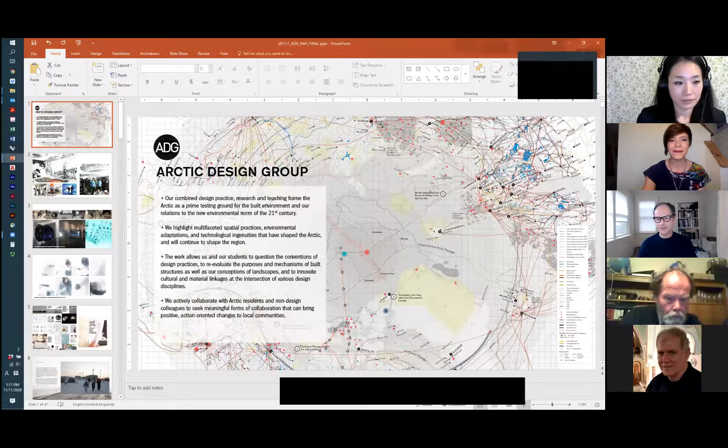Before we start, Leena and I are both based in Charlottesville, Virginia, and we want to first acknowledge the traditional custodians of the land that Leena and I are on today, the Monacan Nation, and pay our respect to their elders past and present.

First we'll introduce ourselves, and then we'll get our talk going. My name is Matthew Jull. I'm an associate professor of architecture at the University of Virginia. I'm also a co-founder and director of the Arctic Design Group, a research and design organization Leena and I started in 2013, focusing specifically on the Arctic and its challenges in terms of design. I started actually as a scientist before going into architecture. I was a geophysicist working in Iceland and also previously in the Yukon. Then I decided to become an architect and went back to school. So here I am, and the Arctic is what we believe is one of the most critical areas to focus on in our work. That's who I am, and I'll pass it off to Leena.

Hi everybody, thank you Victoria for the great introduction. My name is Leena Cho. I'm an assistant professor in landscape architecture at UVA, University of Virginia School of Architecture, and also a co-founding director of the Arctic Design Group together with Matthew. Similar to what Matthew described, I also come from a non-design background and then switched into landscape architecture. I used to work a lot on the political side, first studying political science and then moving on to a lot of NGO work

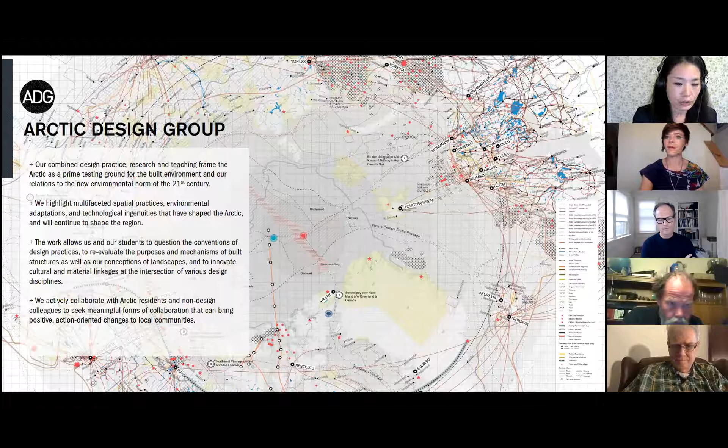before switching my career to design and landscape architecture. So I think, before getting into some of our most recent Arctic work, we bring a quite interesting interdisciplinary approach that bridges between science and community-driven work, and how we can begin to engage these issues through a design-specific lens, mainly through architecture, landscape architecture, and urban design. So with that, I can start with our presentation. Today's lecture is organized in three parts. First, we want to introduce our critical and main approaches to how we begin to research, engage with the community, design, and also teach.

And then we'll be also showing some examples from our own students' work, mainly through the studios that we've been coordinating, organizing and developing in the past several years. And then moving on to sharing 5 different projects that we believe touch upon some of the key areas, mostly in Alaska. And then leading the lecture by introducing and sharing some of our most recent work that bridges from our current past work into the next several years.

So to start off, what you see on the screen are the text, for example, here. These are some of the approaches that we bring, that we think are important when we start to think about the built environment in the Arctic.

First, our combined design practice, research and teaching really frame the Arctic as a prime testing ground for the built environment in the 21st century, especially in relation to the changing environmental norms. And then we also highlight multifaceted spatial practices, environmental adaptations, and technological ingenuities that have shaped the Arctic and will continue to shape the region.

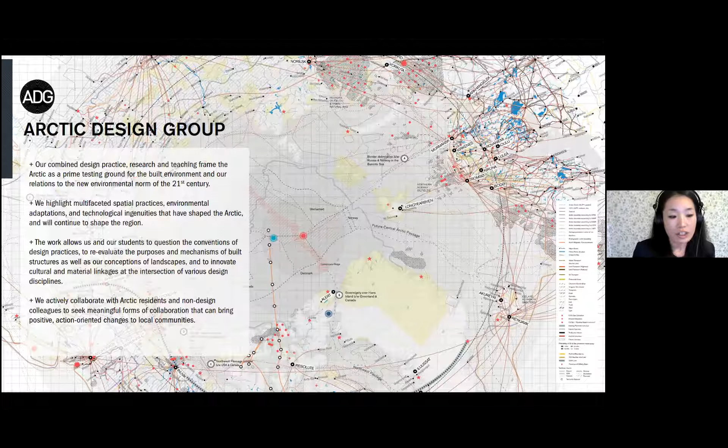But also in the midst of this, we actively collaborate and reach out to Arctic residents and non-design colleagues, such as environmental scientists, engineers, social scientists, and artists, to seek meaningful forms of collaboration that can bring positive, action-oriented changes to local communities.

So first, we're going to talk a bit about some of the earlier work we did when we formed the Arctic Design Group. And before I do that, I want to just acknowledge some of the folks on the call. I see Jack Hébert is there, and CCHRC, Cold Climate Housing Research Center—amazing, we've learned so much from you through the years. As we talk about our work today, it's really a learning process for us as we understand other ways we as architects, landscape architects, and urban designers can work meaningfully within the Arctic region.

And then also collaborating with the Anchorage Museum, we produced a set of what we call the Arctic Portals, which were a set of small exhibition pieces. Again, the focus of these was to create immersive environments that people who hadn't been to the Arctic could maybe understand certain aspects of it.

Either the idea of being in permafrost, or the idea of what it's like to be in a whiteout condition, or in very, very bright light. It's sort of very primary kind of conditions.

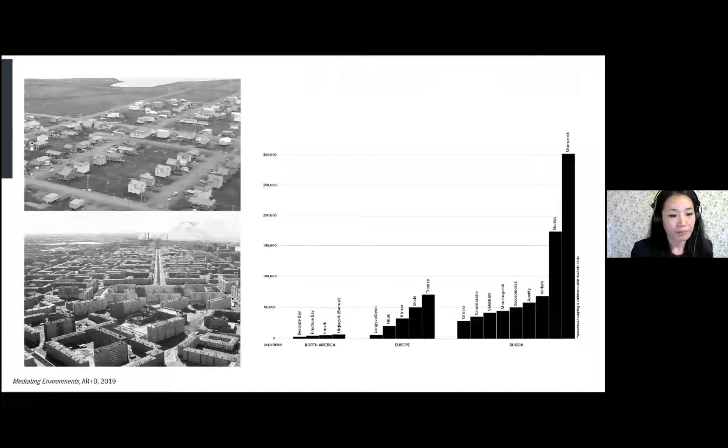One of the things you read about in the media so often is how the Arctic is undergoing drastic changes in the environment through climate change, and also economic transformation, and pressures on remote communities throughout Alaska, northern Canada, and the Trans-Arctic region.

But the one thing we want to acknowledge is that the Arctic is filled with so many resilient people who have had the capacity to live under extreme conditions for millennia, and learning from indigenous communities throughout the Arctic is really an important step as we approach the Arctic as designers.

What's interesting to us is also understanding and acknowledging how vastly heterogeneous the Arctic is. That's one of the remarkable things about our work, traveling out through and visiting cities and communities through Russia, Northern Europe, Canada, and Alaska.

You can see in this image in the top left, an image of Barrow, or Utqiagvik as it's now called, in the summertime, a nice rectangular or rectilinear grid of houses, almost like a suburb. Below that is a picture of Norilsk, one of the big mono-industrial cities in northern Russia.

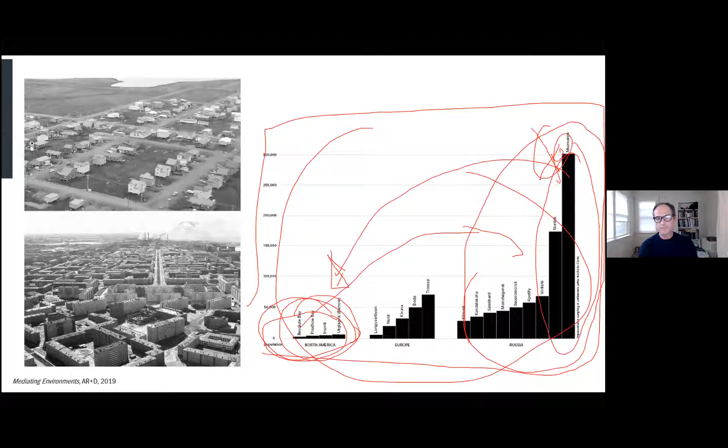As we look at conditions like this, different ways in which the built environment has adapted and evolved, we're bringing forward the idea of how cultural and social value come into play here. This is a really critical aspect of architecture that we want to emphasize in landscape architecture and urban design: our goal is not to optimize for efficiency and economy only, but to optimize for social and cultural value at the same time. How do we bring that into the conversation? That is one of the key elements of our work.

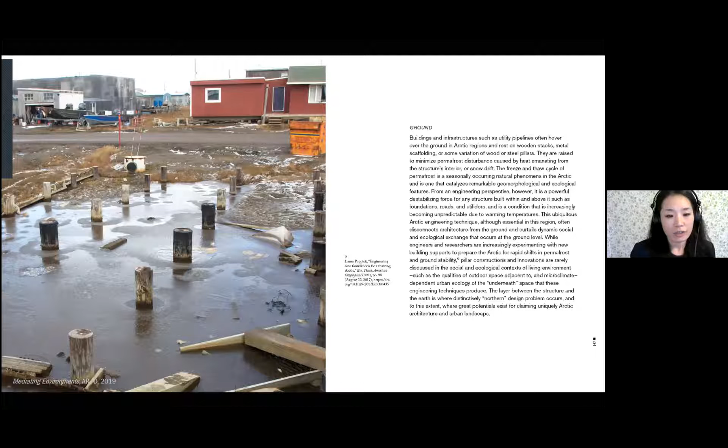Another area where we can focus is the ground itself - the permafrost ground, thawing, frozen, constantly changing. To us, the ground is really important infrastructure for Arctic communities, not only because it is literally the thing that everything stands on, but also various aspects of the built environment, whether it's the foundation for houses or buildings, to utility, to roads - they all intersect and touch the ground itself.

Another key element of our approach is to also think about public buildings and schools. Schools have historically played a really difficult role throughout the Arctic, from residential schools that have caused tremendous amounts of pain through Native Alaskan and Inuit and Inupiaq families and other tribes throughout the Arctic, by creating a condition where their culture, their traditional cultures, were negated through enforced curricula that have been introduced. On top of that - and this is changing - it can go further, but it's changing.

But the other part is that the buildings, the schools themselves are often also very institutional in how they're designed. How can we actually bring more feedback from communities into the design of these schools that really support the values of the community itself, about thinking about the land and the environment? Because essentially, where the children are learning becomes a kind of central hub of a community. Schools need to be important institutions that are really supporting the cultural and environmental needs of the people living there.

Just to add to that, schools often function as the community center, right? In many of the Arctic communities throughout Alaska, but also elsewhere, it's really where the private, personal becomes the collective and communal. So schools are, as much as the ground and the streets, where we can begin to think about what the shared spaces might be like, whether that is indoors or outdoors or anywhere in between.

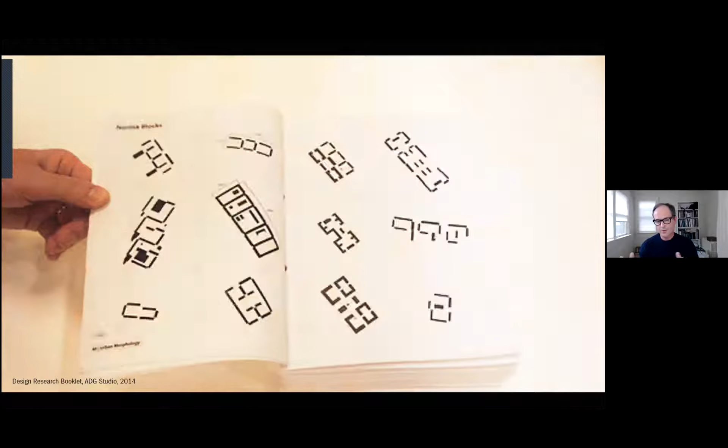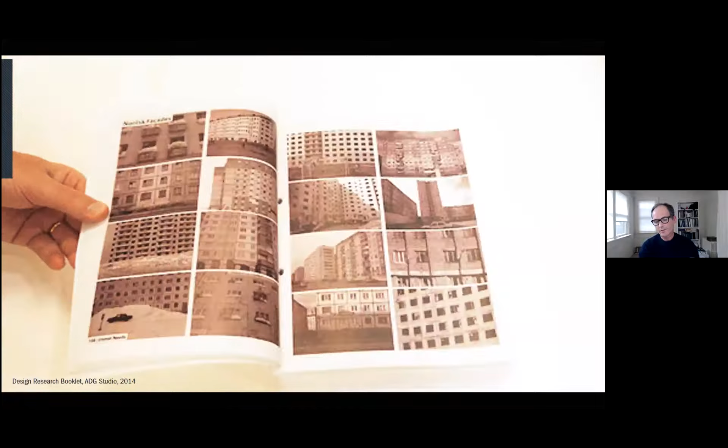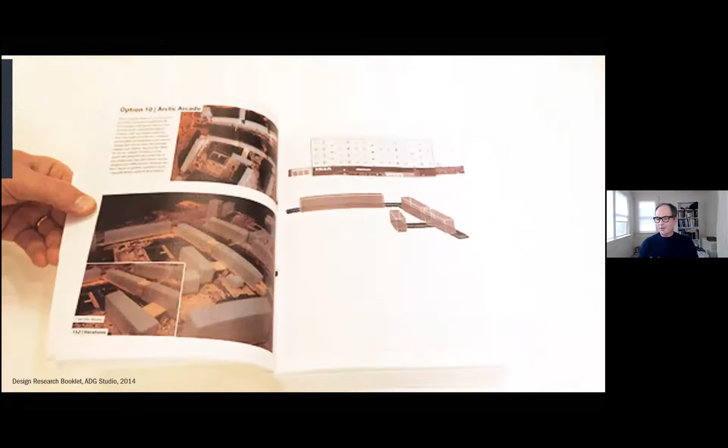So the next section we want to talk about is some of the work we've been doing with our students. Every year, UVA has been really a fantastic place for us to develop the Arctic Design Group, because we're given opportunities to teach studios focused on the north, and they've been incredibly supportive in that capacity.

So for them to travel up and not only just visit, we really emphasize this isn't a holiday vacation, it's a research trip to understand, study, meet with, and listen to people and residents, communities throughout the Arctic.

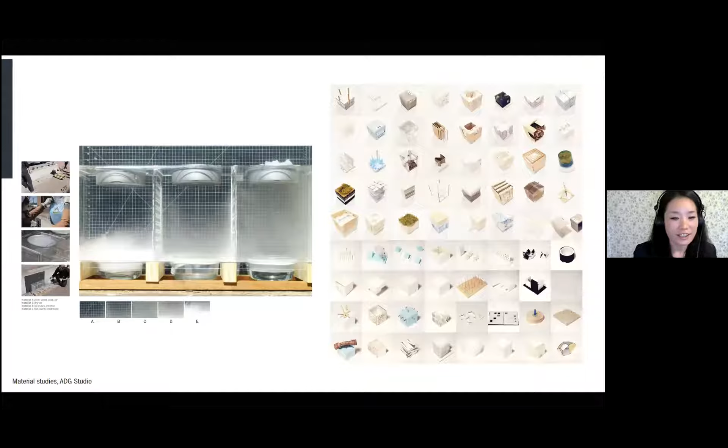What you see on the right side of the image is how we can begin to modify and introduce a variable into the environmental system, so we can think of this as design principles that could facilitate certain design ideas. On the left side is the fog and visibility of the landscape, created by different types of fog, and how the air and aerodynamic systems might work, constructed through model fabrication, examining what gets passed through when different perforations and hole sizes are introduced into walls or structures, and what gets left behind as residual material in material spaces within that system.

As Leena is describing too, part of our pedagogy as instructors with our students is to have them learn by making, by experimenting, but really starting with fundamentals. Understanding how water behaves. In this case, how does it melt? How does it freeze? What happens when it freezes?

These are just examples of experiments that are sort of alchemy. Some of them are maybe really obvious - if you're a scientist listening to this, you're like, well sure, of course water expands when it freezes. But for students to actually develop these little devices that monitor and calibrate, to understand what that expansion means physically - this is part of the language of design in some ways, being able to go from the analytical to the creative, and how these two modes of thinking can inform each other.

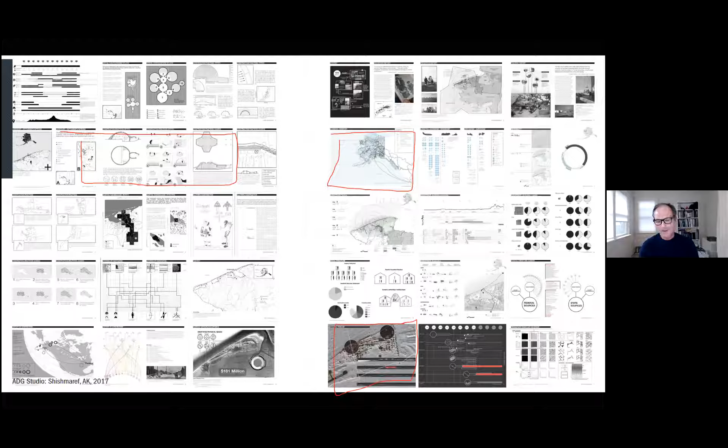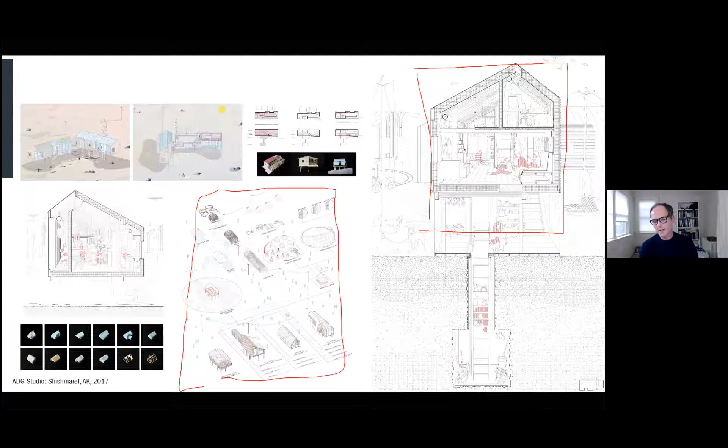So these are a set of studies. We won't unpack all these drawings right now, but essentially they show some examples of the kind of work, getting down to the detail of the wall section, and not only just the conceptual idea.

And then making physical models is really part of the currency of our work as architects and landscape architects, to convey ideas of scale and materiality. These are abstracted, of course, but they are part of our forms of communication, and this can actually work incredibly well. We would have loved to have taken the work to Shishmaref and talked to the community there. Unfortunately, we don't always have funding to do these things, but we keep trying, and that's our goal.

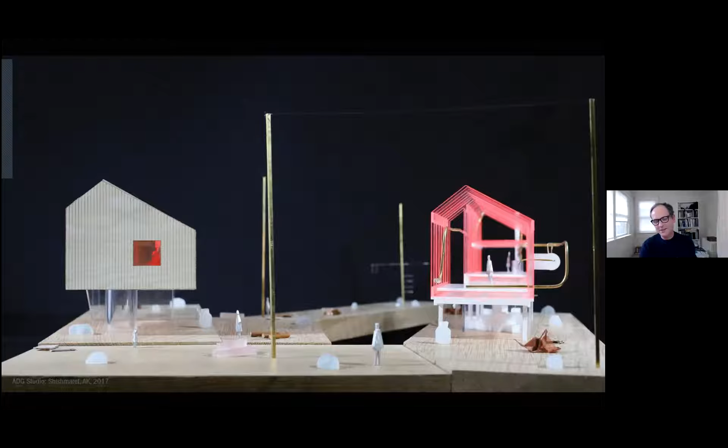This is again through students talking and listening. We went to the school itself, the one we're redesigning, and also visited the archives in Anchorage and the Anchorage Museum, thinking about ways to integrate the school into the context, into the forest, and areas of thermal exchange that can happen, ways we can conserve materials while also connecting the students to the environment around them.

So there are outdoor learning spaces as well as indoor learning spaces. These are all really preliminary sketches, but they're an effort towards starting that conversation about what future schools might look like, and that's really essential to the work.

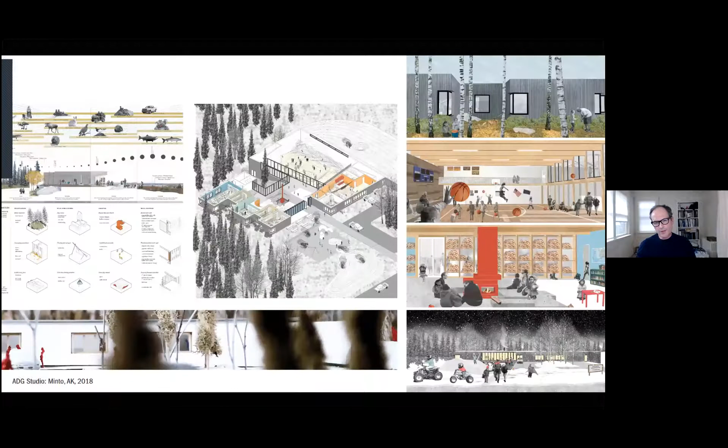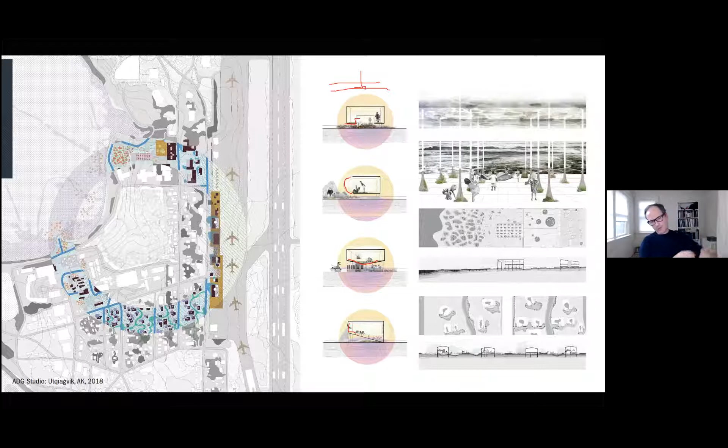That's what these drawings really mean. They're like, as Leena is saying, this unused underbelly of buildings—which we've seen incredible examples of, particularly in Svalbard, where the underside of buildings becomes a whole other space that's part of the building, a beautiful space. Why couldn't we see more of that? So it's a fertile area for experimentation and development as a design area. I won't go on further, but that's maybe how to read those drawings more clearly. And then there's the example Matt just mentioned in Svalbard.

One example we saw in Longyearbyen was a kindergarten building, where they were using the underside of the building—the foundation space—as a semi-indoor outdoor play space for children. What was really interesting was that we didn't know it was there. We were walking on the street facing this kindergarten, and we kept hearing kids' voices, laughing and crying, from the ground. That's what led us to visit the kindergarten and ask if we could take a look at what was going on. That's how the conversation really started.

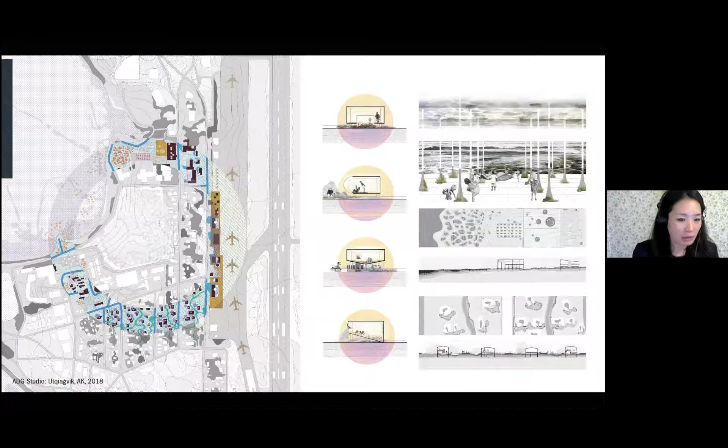But going back to this image as well—when we're talking about the identity of these semi-public, public spaces in the Arctic, how can we begin to create and extend this liveliness that already exists in the communities into some of the spaces that are shared?

In sometimes very unexpected areas, but also as a way to think about how we can begin to foreground the well-being of the community through the imagination and speculations of the built structures themselves. And then coming back to Shishmaref, Matthew mentioned some aspects about this when he was talking about that regional, cultural and historical analysis of Shishmaref.

This student work is really talking about what's missing or what can be better foregrounded in the current discourse of relocation. So here, the group of students were looking at this in relation to food security. How can we begin to address and use the discourse of relocation as a way to then address food security? That's one aspect.

And the second aspect is, in this particular project, they were working with two different sites. One is Shishmaref, and the second one was the West Tin Creek Hills, which is one of the locations identified as a potential relocation site.

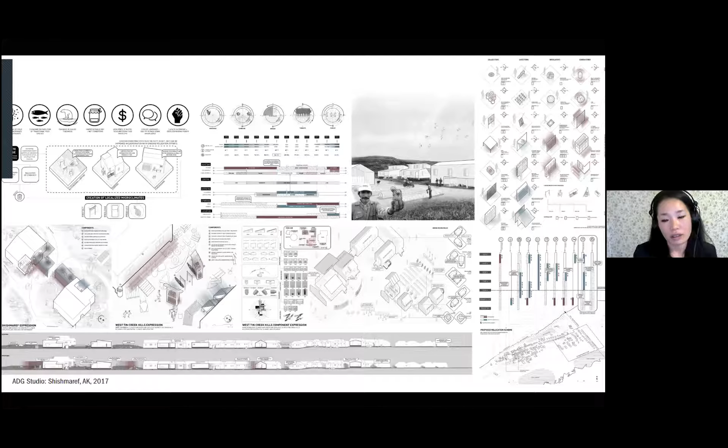And then with those, how can we begin to create some of these smaller structures to allow certain vegetables to grow much better than others? So from the urban scale to regional, as well as to a much smaller structural scale, really foregrounding the interconnected aspect of the food system as the design drivers for Shishmaref.

And this is one image that talks about how the everyday stories could emerge out of this. For example, mesh can collect water by trapping condensation from fog. Shade mesh insulates underground storage and maintains cold temperature. So it's really bridging the microclimate, but then geared towards thinking about food.

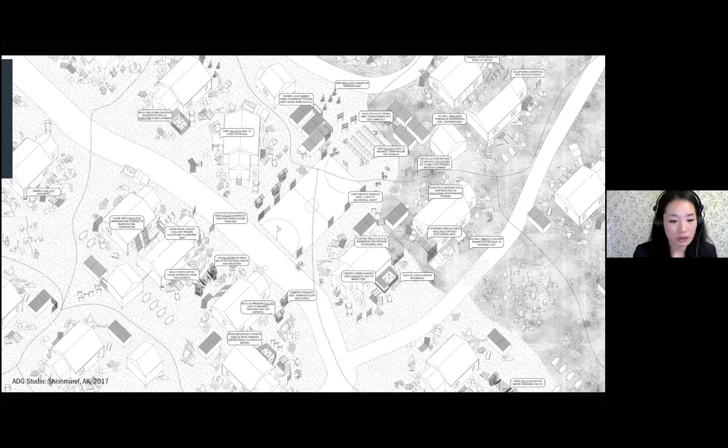And really addressing what we believe is the fundamental challenge when we discuss communities that are on the move, for example, and getting down into these very culturally specific issues as the main driver for that design.

But let's go, we've got one more project to talk about, right? Is that... and then yeah.

So, the most recent one. We were very lucky to be able to travel to Barrow just before the COVID lockdown happened, in late February earlier this year.

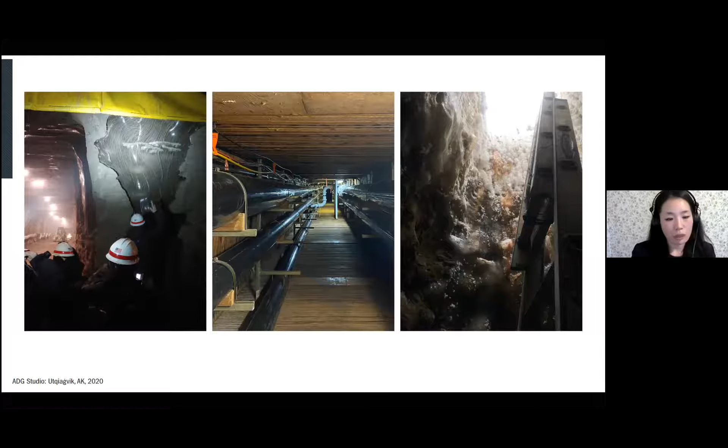So we're looking at the ground from multiple different lenses—from engineering to communities to scientific practices. What you see here reinforces that idea, where ground brings together indigenous, scientific, agricultural, and engineering practices. It's really about that socio-ecological understanding of the ground that we wanted to test and point to.

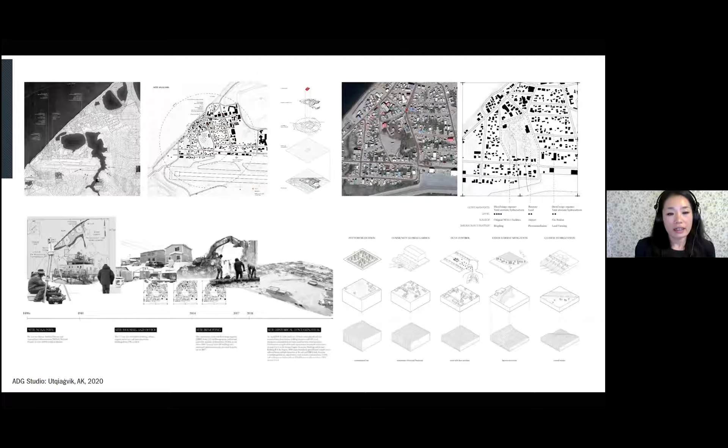A lot of these are already happening through various engineering and scientific experiments, and we wanted to tap into that and think about expanded design strategies that tap into these cultural and socio-ecological elements.

Here you see some images going back to that same site. What was really interesting about this project is that this remediation process would start as part of thinking about and reorienting the current conditions of the site, then slowly and incrementally build those sets of buildings as well as public spaces as part of this design investigation.

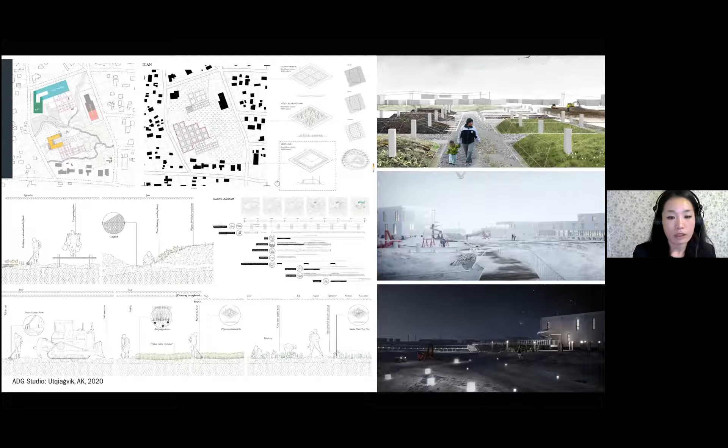All of these were driven by community engagement, involving community members to take part in and have a voice in, creating a sense of ownership from the very beginning of the design project. This ranges from linking to local high school and middle school communities and students as part of the educational system, all the way to creating public spaces that these building components are inserted into, as a way to address the larger issue of reimagining and creating communal and public spaces.

So the last part of the talk, this is very short, is just to talk a little bit about a couple of events and one project that's just started recently.

One is the Bridging Science Art Community in the New Arctic, which was an amazing moment here at Charlottesville. We welcomed colleagues from across Alaska, and in particular the Arctic Youth Ambassadors came to join the meeting. It was amazing to hear from them about their communities and what their priorities were. We had designers and scientists meeting together, and a strange and beautiful music interlude with our brilliant colleague Matthew Bertner and his colleagues. It was a fantastic moment to synthesize an alchemy of perspectives that were really exciting.

Because so much of what we believe about the Arctic is that the future of the Arctic is really in the hands of the youth of the Arctic. Even from an architect's or landscape architect's perspective, what are the future architects from these communities that will help design their communities in the future? That's a crucial step, as opposed to outsiders coming in and saying you should do this - that sounds like a colonial model. So we're really cognizant of that, and engaging youth across Alaska in terms of design, and from other countries for that matter, is one of our priorities.

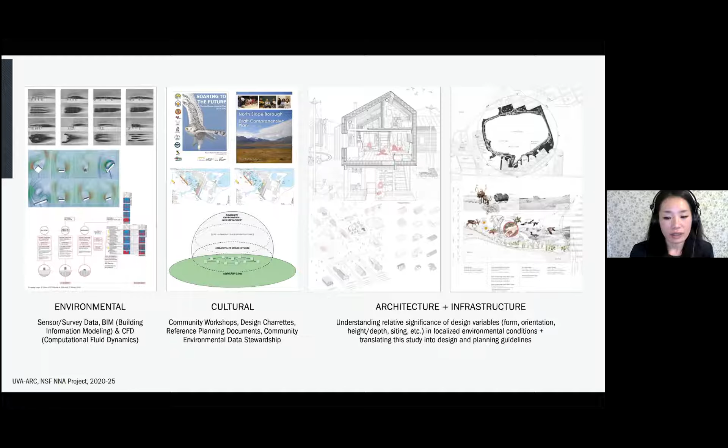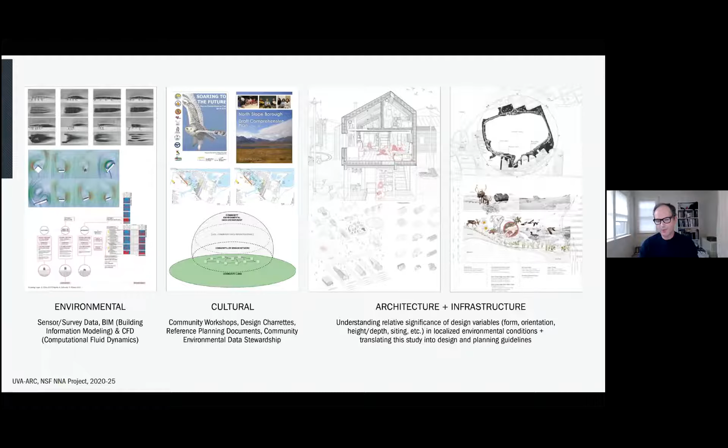A really interesting part of that is not only deploying sensors, but how the sensors are deployed — the process. We're also talking about data sovereignty, and how the community in Utqiagvik has sovereignty over the data. This is ethics of data, a really crucial aspect of the project, in addition to our colleague Caitlin Wiley's research focus on the co-production of knowledge.

Reiterating what Matthew just said, some examples of how we're thinking about carrying out and concretizing this project: we'll be co-determining the sensor locations based on community-specific challenges and needs. These sensors would be high density, down to the level of detail that could inform the human-scale built environment.

Matthew also mentioned data stewardship and open access — making the data open and translated and visualized so people can understand what it means. We're also incorporating place- and culture-specific design criteria in our analysis and guidelines, together with community members, especially the Planning and Community Services Department of NSB, to ensure this study is meaningful and applicable to the needs and desires of the community members.